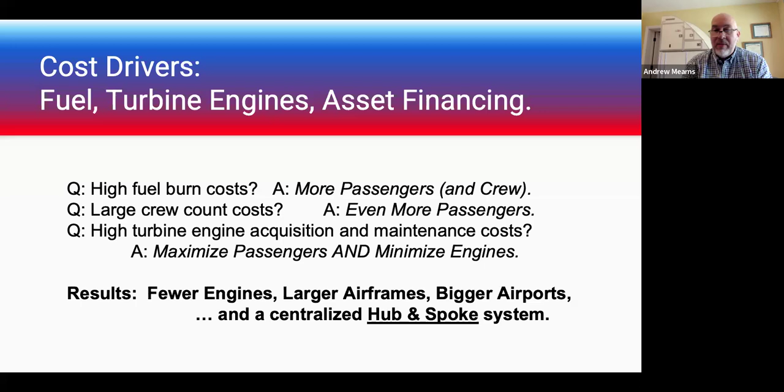And the result is we have fewer engines than has been the case in the past, bigger airframes that are using larger airports, and a centralized hub and spoke system today. So we don't see 4-engine aircraft like we used to. The 747s are being phased out. We're moving to 2 and one engine aircraft for efficiency's sake, but that lack of redundancy isn't necessarily a safety feature.

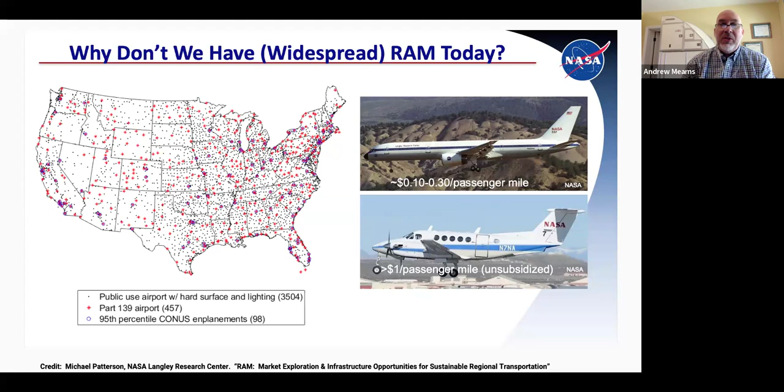So big picture, why don't we have more regional air mobility today? It just comes down to cost per seat mile. On the smaller aircraft, we're talking about $1 or more per passenger mile, and with the larger aircraft using the hub and spoke system, it's more like 10 to 30 cents a passenger mile. What that's created is a situation where for shorter trips, people are just driving. In the US, for trips up to 500 miles, almost 90% are done by car, and more than 70% in Europe.

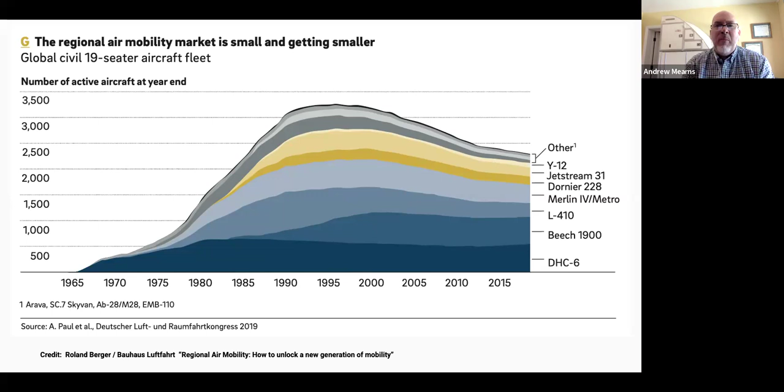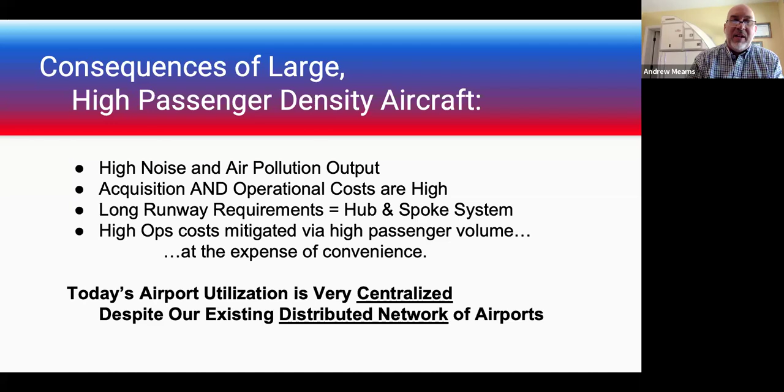So consequences are that we've got loud polluting aircraft today. Costs are high, both operational and acquisition, and we need those big runways. That's causing us to have the hub and spoke system. And those high costs are getting mitigated by high passenger volume, which continues to support the larger aircraft.

Hey, can I have everybody mute? I apologize. Catching a little bit of feedback here. Yeah, that was me. Unfortunately, I lost my internet connection. I'm back on again. I was using my phone. Okay. It should be okay now. Sorry about that. Okay, awesome. Yep, no worries. All right, here we go.

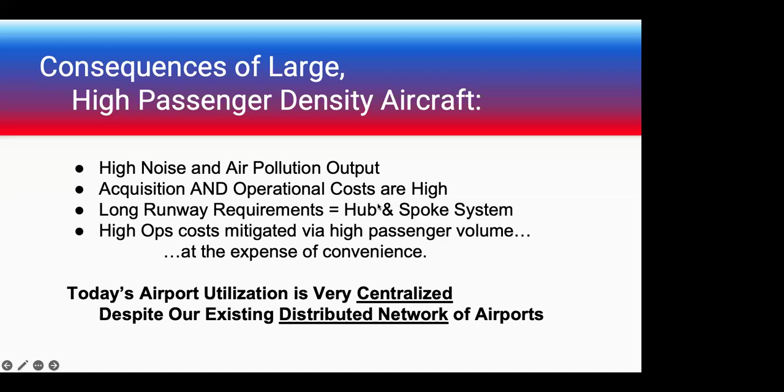Sorry about that. Okay, so we've seen situations like this in the past where we've got an existing network, but we've got equipment that is large and cumbersome, and that we would like to have smaller and more convenient. And that was in the 80s with the computer revolution. We already had an existing network for communications. Most homes already had a phone line. What we needed was the equipment to get smaller and more user-friendly. And that's where we are today with regional air mobility.

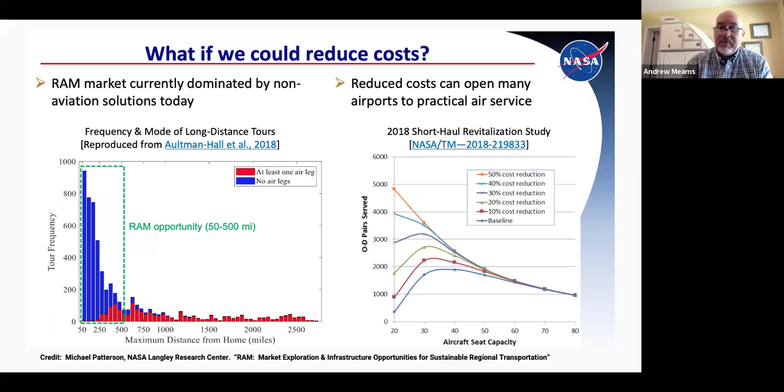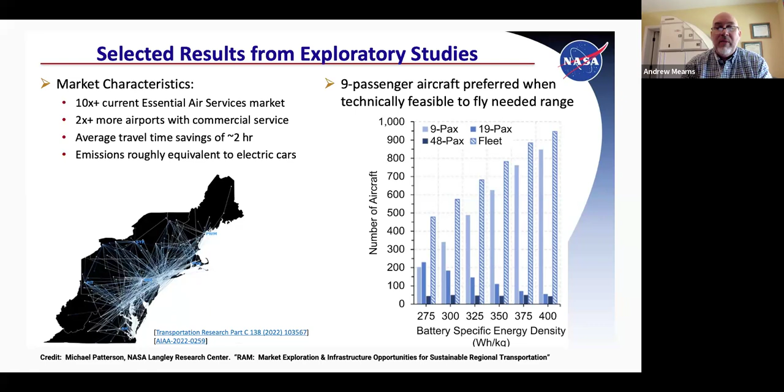If we could bring those costs down, NASA took a look at this. They found that for every 10% in cost reduction that we're able to create through more efficient aircraft, that could add between 500 and 1,000 city pairs for each 10% in cost reduction, which is a big deal. That's a lot of cities paired up. And they also found that the ideal aircraft size might be about 9 passengers based on current regulations and capabilities of the aircraft.

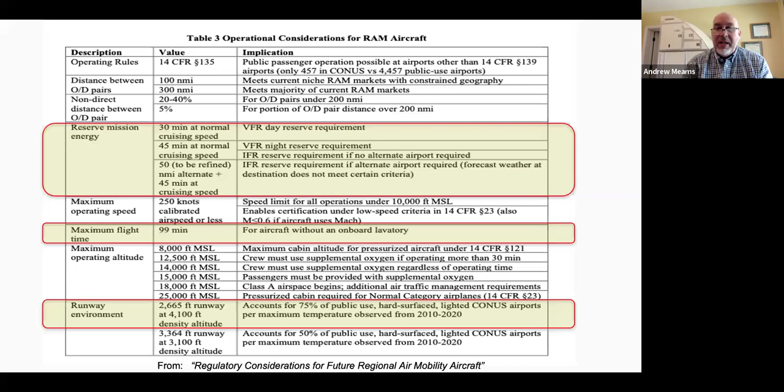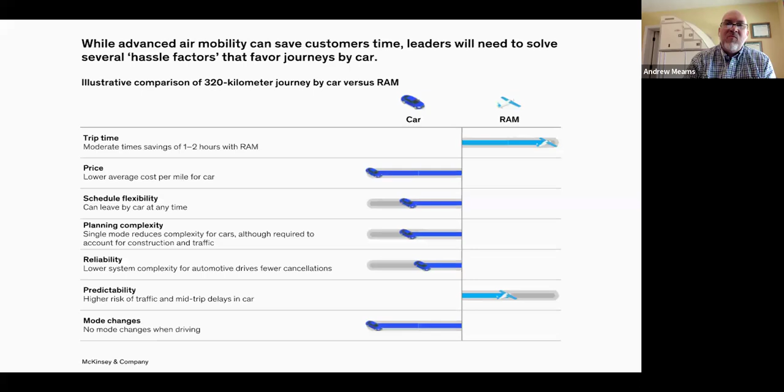So the way to make regional air mobility easy to use and unlock the value is to make it efficient and affordable. Electric motors and fixed wings are a great way to do that. We can have meaningful time savings with convenience and flexibility. Rideshare apps, just in the same way that we've moved from having to call a taxi company and hope for the best. We now have more control and are pulling from a wider number of potential service providers. The same can happen in aviation and will.

And then societal acceptance is going to be important as we are able to show people the benefits of distributed electric propulsion, the safety, the redundancy, and so forth. That's definitely going to help, as is the quiet. And then the environmental friendliness is going to be another positive, where local people near the airports can start to see and understand that these are quieter aircraft with little or no air pollution.

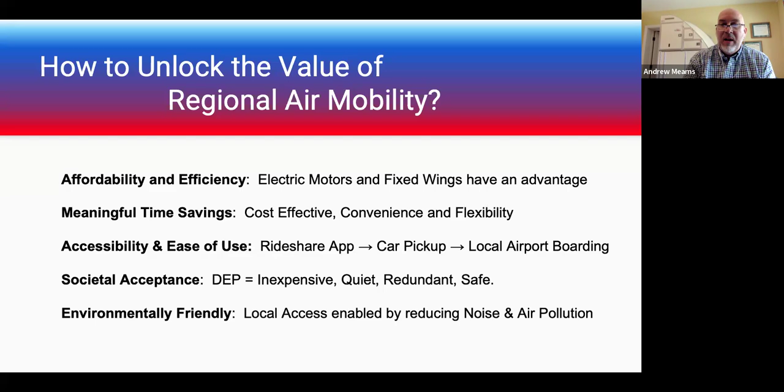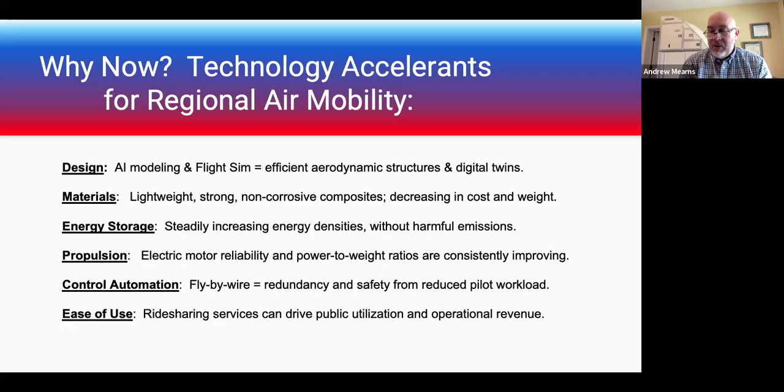So why do we think that could be the case today? Well, we've got a confluence of a lot of different technological capabilities in terms of design, materials, energy storage is changing, our propulsion options are increasing, control automation with fly-by-wire systems, and the ease of use that we talked about with apps. All those things are coming together and can have and will have a big effect on the way that we

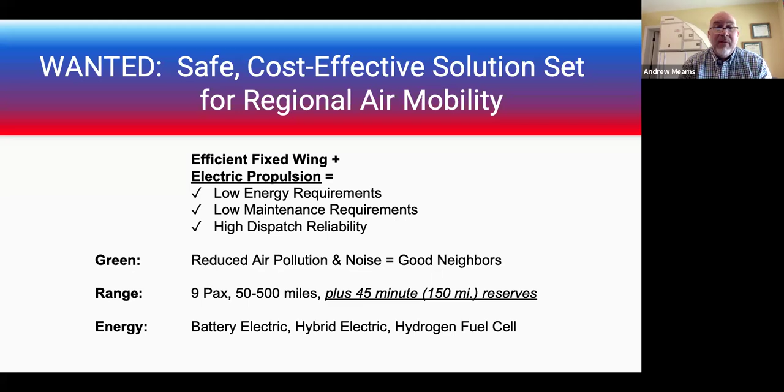travel. So we're looking for efficient aircraft with low costs, and that can mean fixed wing is a great way to go, unless we have applications for vertical takeoff and landing. Fixed wing is just very efficient. With all or some electric propulsion, that gives us a lot of efficiency and allows us to take advantage of distributed electric propulsion, because we need the range that we want of maybe 90 minutes of flying plus another 45 minutes of reserves, another 150 miles. That can mean battery can work well, but hybrid electric can potentially work even better because it gives us more

range. And if we look at the car world, I drive the car on the right, the Chevy Volt with a V. It's got a battery plus a generator. The one on the left is all electric, so a battery. My car, the one on the right, I didn't need any special infrastructure, just plugged it into my regular outlet on the wall. Versus an all-electric car, we'd need at least a charger, so it needs a little bit of infrastructure. They weigh about the same, but there's a big difference in the range.

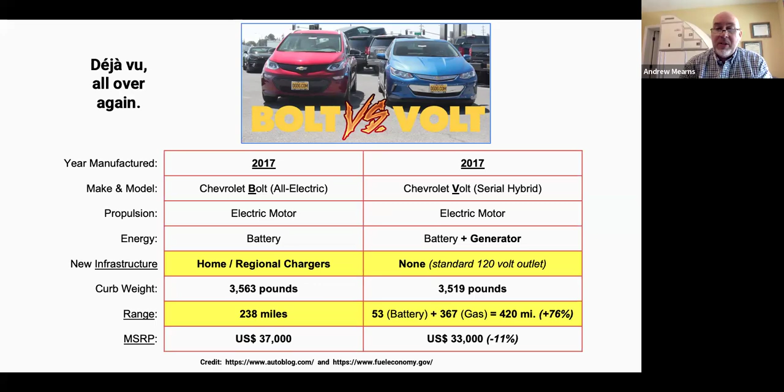And if we think about having to subtract 150 miles for an alternate airport, that's going to bring us to less than 100 usable miles on an all-electric vehicle versus with the gas generator and the battery and my car on the right, I've got a lot more mileage to work with. And therefore, even when I pull out 150 miles for just breathing room, I still got plenty of range left. And that is something that many companies are applying to the aviation world.

So that hybrid electric architecture can work well, given the fact that we need to have reserve range, and we also want to have 90 minutes of flying time to get us between city pairs. So these are some of the positives, and we're using tried and true technology. APUs are not a new thing in aviation. They generate a lot of power. They're smooth, and they can be paired up with batteries to replenish those batteries.

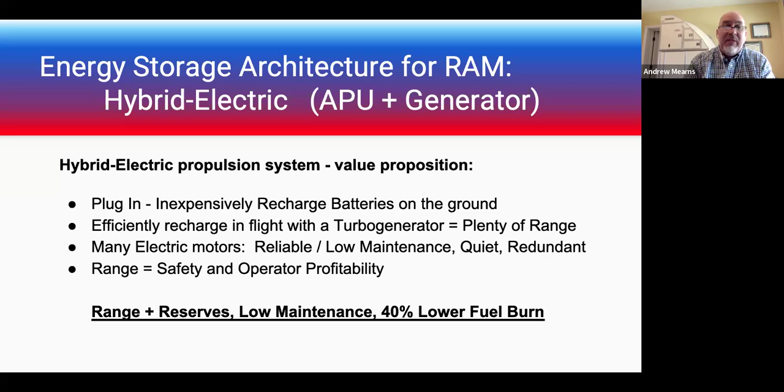And also, when you've got both batteries and an APU, both can be outputting power for takeoff phase of flight when we need the most power. And then over the other easier phases of flight, the APU can be running to replenish the batteries. Kind of a cool system. Saves fuel and gives us the ability to have an electric system that then takes advantage of distributed electric propulsion and some of the other advantages of electric motors.

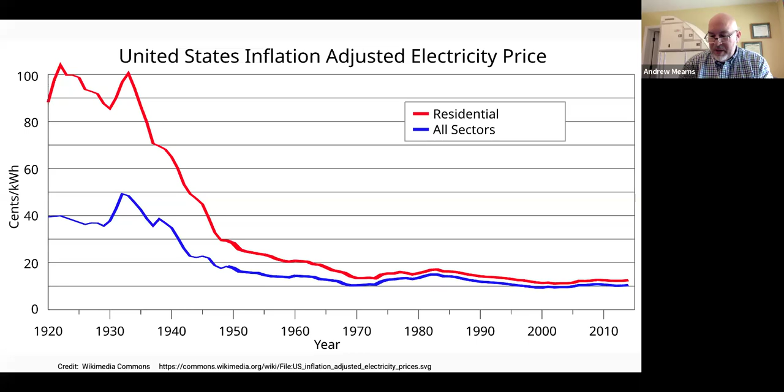When we use electricity, we've got pretty stable costs versus when we look at fuel costs. They're fairly low now, but I'm old enough to remember that has not always been the case, and they can be fairly unpredictable. The other positive to pivoting to electricity is that we've got a lot of pollution fees that are coming down the pipeline, certainly in Europe already, more so on a state-by-state basis in the United States. And it's going to shift the advantage to companies that are building aircraft that are completely or partially electric, because they're going to be more fuel efficient. These are some of the carbon pricing initiatives that are ongoing. There are many more beyond that.

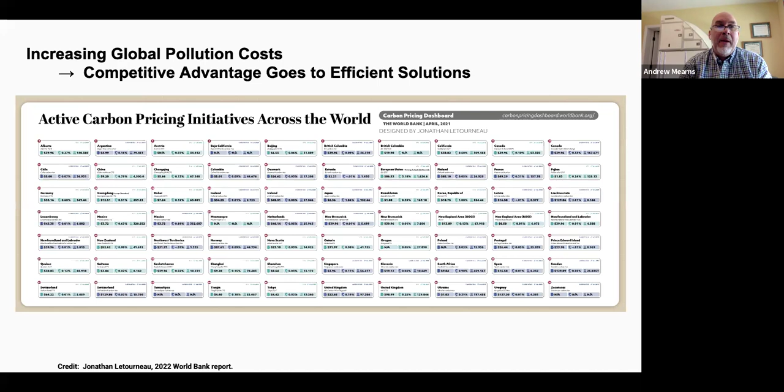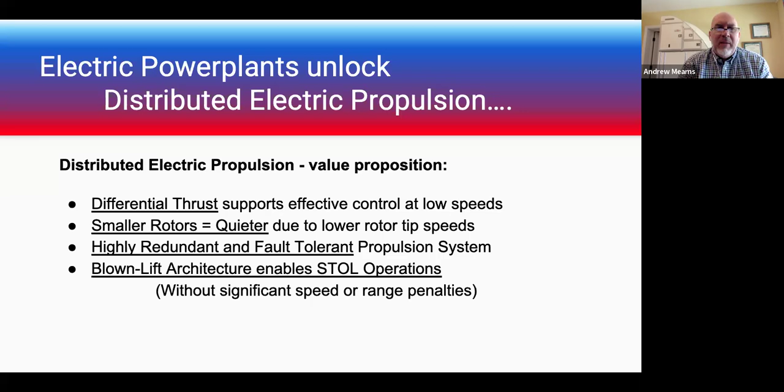And so this is just sort of a summary of when we're able to pivot to electricity, some of the positives that we get from that. Differential thrust gives us great effective control, even at low speeds. Smaller rotors are quieter. We've got better redundancies, and electric motors are extremely fault tolerant and reliable. And then if we think about blown lift architecture, that gives us some new superpowers in terms of being able to take off and land with very short runway distances.

Some advantages of blown lift eSTOL. There's no transition change, so we've got less to worry about, fewer things to break in terms of single points of failure than we would with a transition changing aircraft. Fixed wings are always great when we can use them. They give us the best efficiency, and aircraft with glide ratios make me feel good. All else fails, I can find a nice road and put it down.

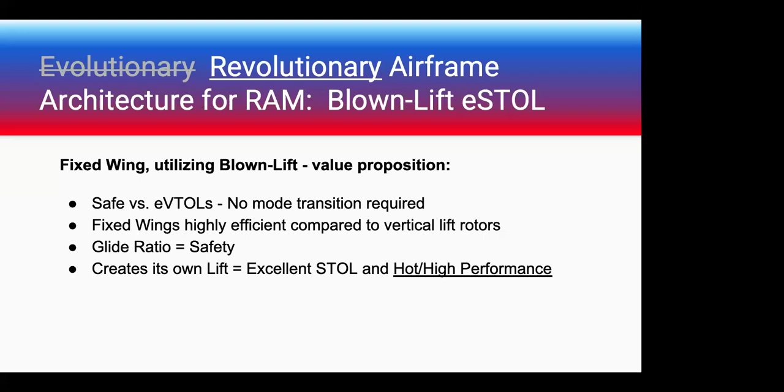I have a question. Yeah. These STOLs, do they need a longer runway to land than to take off? That's my common sense. You know, I think they can create a fairly high amount of lift without forward airspeed because of this architecture. However, the downside is normally that when we're landing an aircraft at a very low speed, our control surfaces start to get mushy. And if we're doing that in an environment where a precise landing is important, like we're looking at here, that matters.

Where an aircraft like this, I think, can mitigate that issue is with the distributed electric propulsion. So even at a low speed, if we need to pull right or left, we can do that. The flight computers will do that by taking into account our control inputs to a power-by-wire system that will then supply the appropriate amount of power to the rotors that need to pull us left, right, up, or down. And in an architecture like this, if you needed to nose forward or nose back, you could actually do that with the rotors by changing their speed. So to answer your question, I think we could have a fairly short landing distance as well, without a problematic loss of control due to the slow speeds.

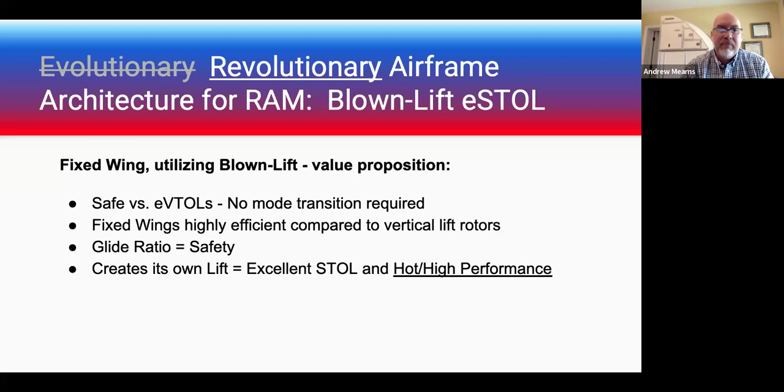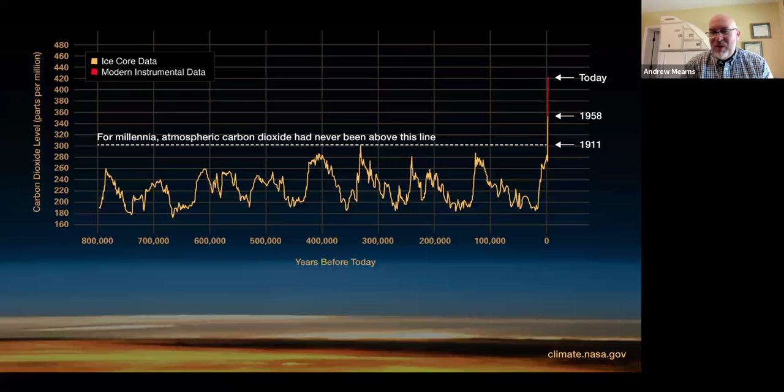So we talked a little bit about the temperature change. The warmer it gets, the more lift we need to create. As carbon dioxide in the atmosphere is building up, it's just like a blanket or like the glass in our car on a hot day. It's just trapping the heat, and it's been going on for a while due to the emissions we create when we burn fossil fuels. No surprise there. I've had people tell me, oh, well, it always fluctuates. And that's true. It does, but not to this degree, certainly. And this is from NASA's data. And so I agree, carbon dioxide in the atmosphere does fluctuate, but the last time there was this much, I think Florida would have been under the ocean.

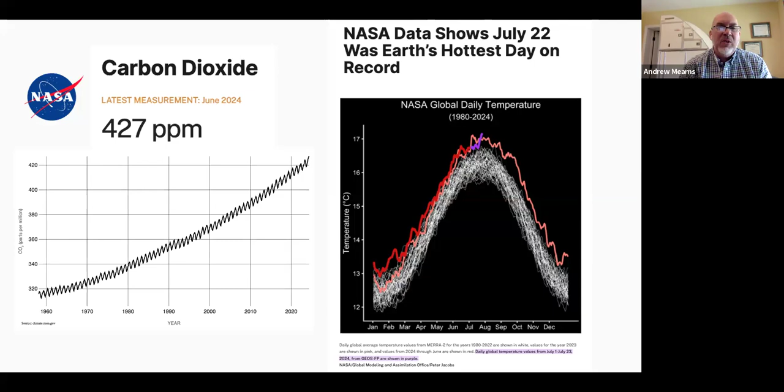Hottest years on record. It just is getting hotter every year. We had the hottest day in history of all time in July of this year, as we're cruising through 420 parts per million. And that impacts air travel. Of course, the hotter air makes it more difficult for us to take off. We've got shifting wind patterns. Hurricanes are more likely when the ocean water is warmer. So we're expecting more of those to hit us here in Florida, which will be super fun. And of course, a lot of our major airports are near coastal areas, and seawater threatens those airports. So electrification and having more efficient aircraft are good ways to start to mitigate this.

It's making the news, what's going on with climate and aviation, and that means that it's getting people's attention. And the good news is that a lot of investment dollars are moving into electrification and new types of aircraft that are more efficient. And certainly that will be the case with both electrification and regional air mobility. Solar capacity is increasing, and that's great because that's going to make clean electricity less and less expensive. At the front of this meeting, we were talking about solar panels on homes. I don't pay for electricity anymore, and many people aren't, and it's a great thing. And that's going to happen in aviation as well, to continue to bring the cost down.

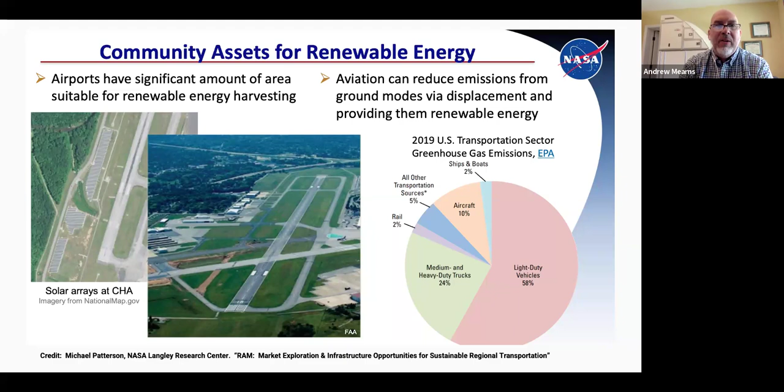Airports happen to be a great place to put solar panels. We've got a lot of space that we don't want occupied by anything taller than a foot or two, and that could mean solar panels. And so then airports can start to become producers of electricity rather than solely producers of emissions.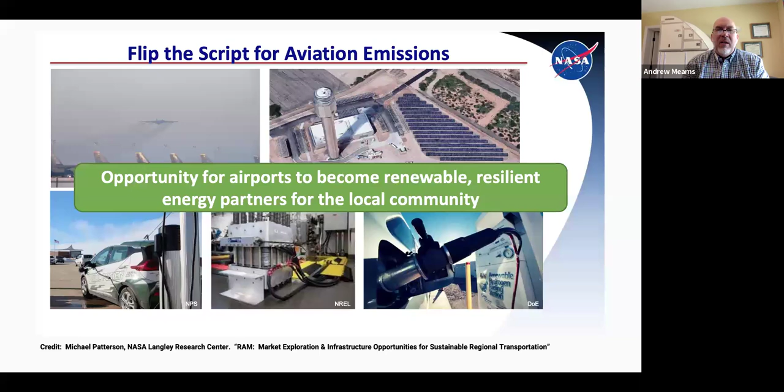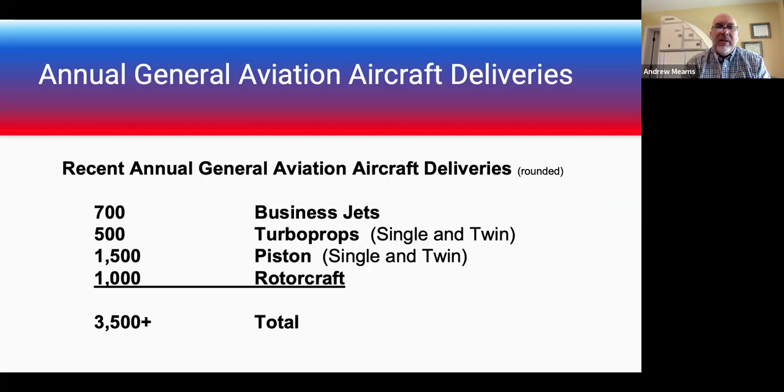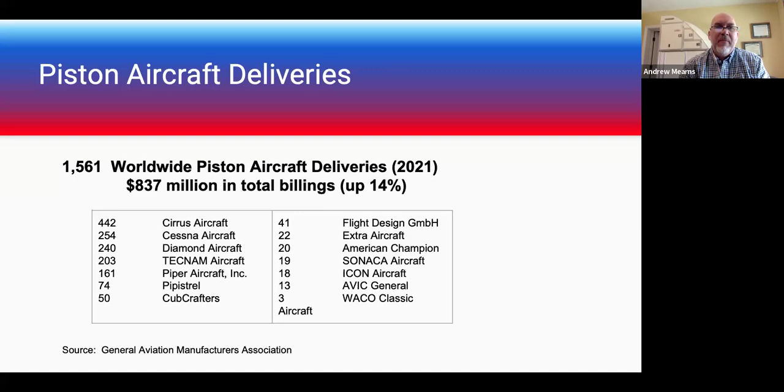All right, so now we'll finish up just with a quick look at the total market and who are the buyers for these aircraft. According to, I think it's the General Aviation Manufacturers Association, there's about 3,500 aircraft that are delivered every year. About 700 business jets, 500 turboprops, 1,500 piston aircraft, and about 1,000 helicopter deliveries.

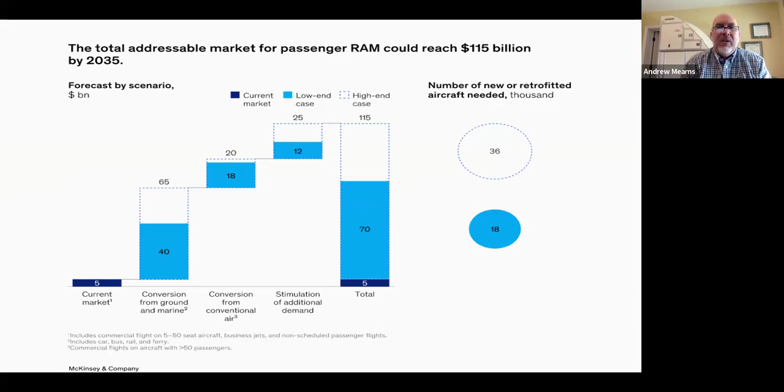McKinsey took a look at the total addressable market and analyzed that over the next 10 years, between 18,000 and 36,000 regional air mobility aircraft could be absorbed into the market. That's 1,500 to 3,500 aircraft a year. And to give that some context, 1,500 is about the total number that were built in 2008 at the previous production peak. So this is a big change in terms of aircraft production and specifically the way that we will be able to fly.

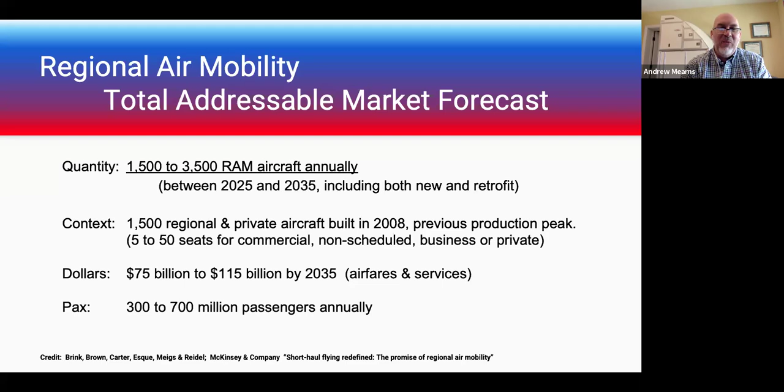In terms of dollars for services, 75 billion to more than 100 billion. And this could affect 300 to 700 million passengers a year, of which I would like to be one, because we do end up doing a lot of driving trips that I think we'd all rather fly, but it's such a pain that we don't. Companies are investing.

Great. Thank you. What questions and discussion points do we have? Ben, you've seen this one before. Did it get any better? Yeah, no, it was still, I took a lot of notes. So no, it's very information dense. So there's always something in it to catch almost on every slide. Good, good. Yeah. It's an eye opener. I think it's a great pick.

One question I have is looking at the economics: as we shrink the size of the aircraft, then the salary of the pilot begins to rise in terms of percent of ticket. Is there a crossover point there? I have a feeling that one of the reasons why we don't have VLJs doing this is because we realize we can't pay to have that person drive 2, 3, 4 other people without having enormous ticket expense.

Yeah, it is true. It does spread both the fixed and variable costs over fewer seats. I think one of the positives is that, instead of 2 crew, we've got 1, and of course the training minimums can be a little bit lower. So this could be a feeder situation for people that want to be gaining more flight experience to then wind up on larger aircraft where they could potentially be making more money. But it's a good way to accumulate that experience.